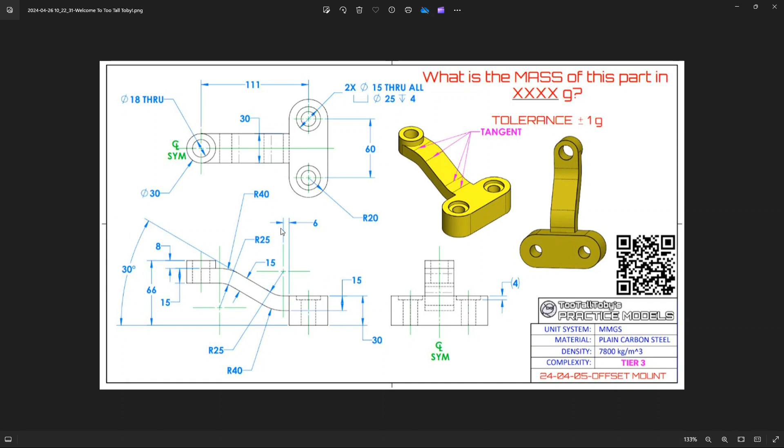Go ahead and hop over to IronCAD and I'll show you how we can design this. IronCAD has a lot of standard features that it comes with.

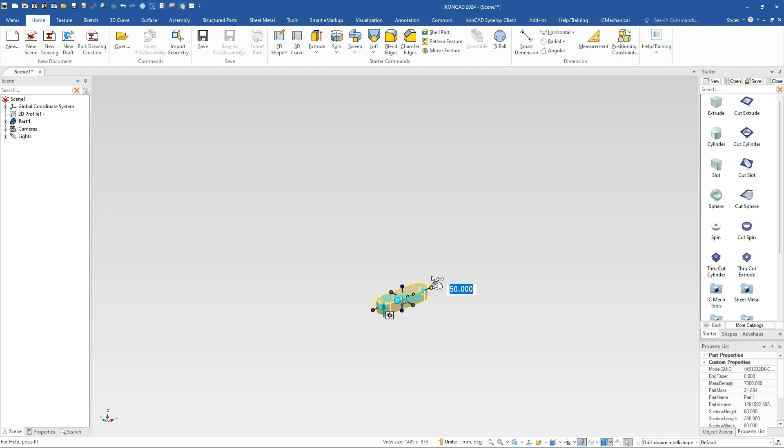For example, we have a slot feature that we can drag and drop out. We know this slot's length is 60 millimeters from center to center plus a 20 millimeter radius on each end, so that's a total of 100, which we can set up easily. Hitting enter, our handles toggle to our width handle, which we know is 40 millimeters, and the height, now on top, by hitting enter again, we're going to set that to 30.

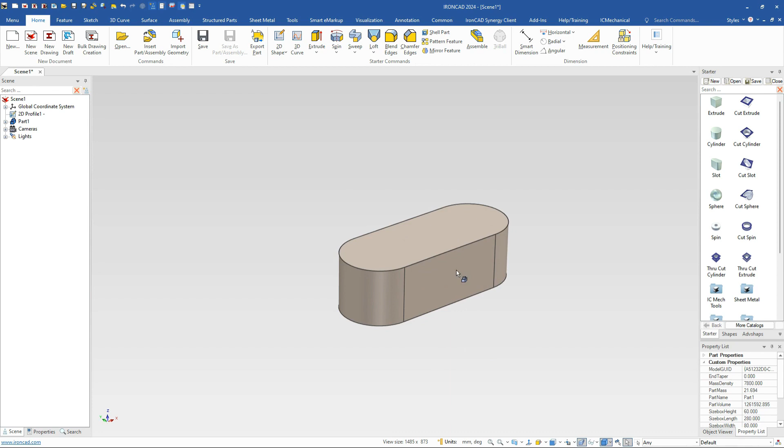So we quickly set up our base geometry, and we're going to just drag and drop a cylinder onto the center point of our slot.

We know this cylinder is going to be 30 millimeters on this one, and we want to go ahead and just extend this down to the bottom. I'll show you a simple way to do this.

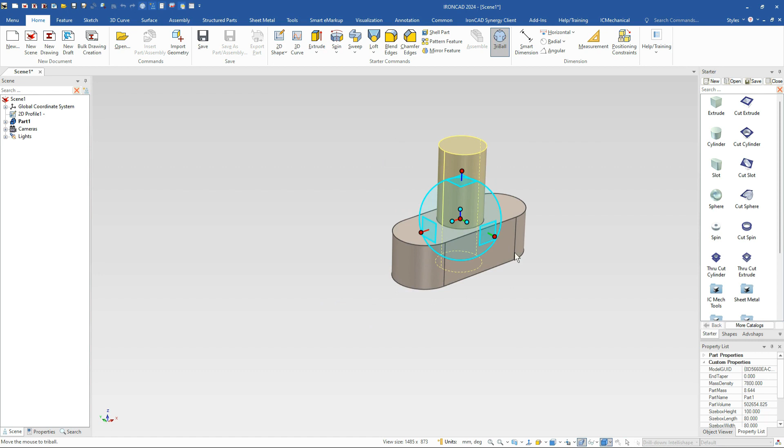What we're going to do is move that out because we have a dimension that is out from the center of that slot at a distance of 111. We'll place that, but they give us a distance or total height of this thing from the top of the model, so from the bottom to the top we've got it in place. That's why I pulled it down to the bottom.

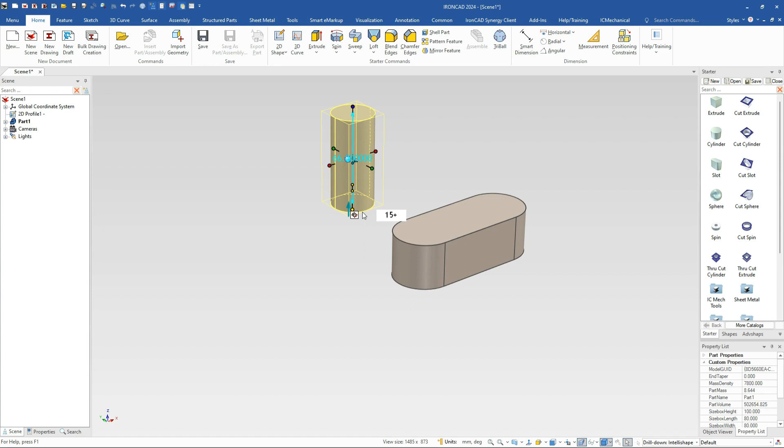We just type in 66, and we know the overall height is just kind of an offset here. We're going to type in 15 plus, and they gave us a value of 8 inside of there to position and size that cylinder. So that gives us our base point for our geometry.

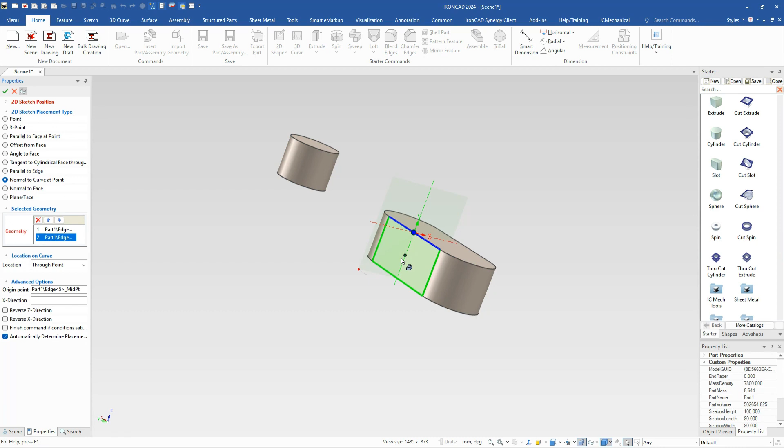Next we're going to do our extrude here, and we're going to do a mid-plane extrude. Let's go ahead and select our part and create a sketch. In this case we want to do it normal to curve, right at the top of this model, along this edge on the midpoint, that's where we want it. We'll go ahead and hit OK to place that.

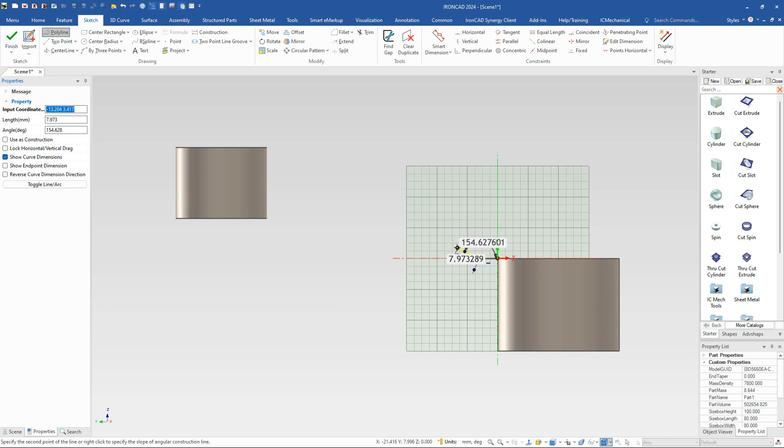There are multiple ways that we can create this. We can create some lines, some cylinders, and do some trimming and positioning with those curves. Another way is to use our Polyline command. We can start at our 0 point, move it out, right click, and say we want a value of 6 millimeters off of there. We're still in our polyline, but if you hold your left mouse down and click, it changes into an arc.

So we want an arc here, which automatically gives us our tangency there, and then we can just right click and put the values that we need for this. We know this needs to be a radius of 25, and we want a negative 30-degree angle on that. Now that puts us right where we need to be, and we can pull this line up however we need. Just make sure our tangency, you see that blue tangency icon there, so move it off and move it back. That maintains our tangency for us.

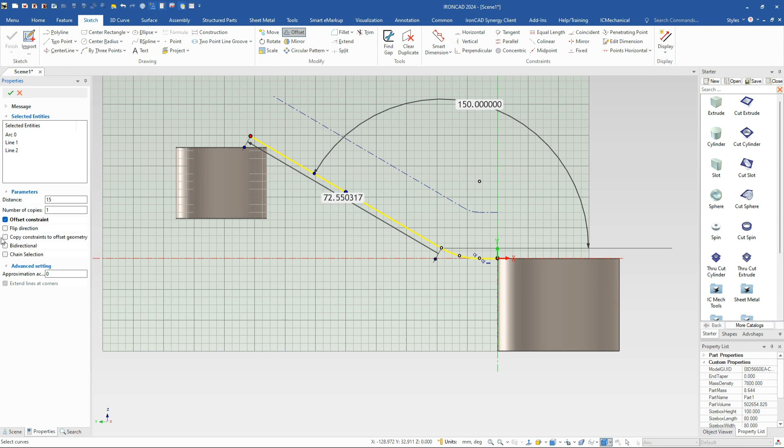So that gives us exactly our curve that we need to offset. Now we can simply select this curve, offset it, type in a value of 15. We're not going to use constraints here, but we can just flip it around to do that. So that gives us our offset values there, and go ahead and hit place for that.

Next, we can just draw our 2-point arc for this one, which is on our center point here out, and offset it as well. So we can select that and offset it 15 millimeters as well. And we simply trim off our geometry. So we don't need this here anymore, or this information. We know when we offset this one it will actually give us our 40 for that value. So these two in this end is almost done.

We just need to add our fillets and our closed lines. So we'll simply add a fillet here, which in our case is 40, and this one is 25 for that one. And last, we can just draw our line.

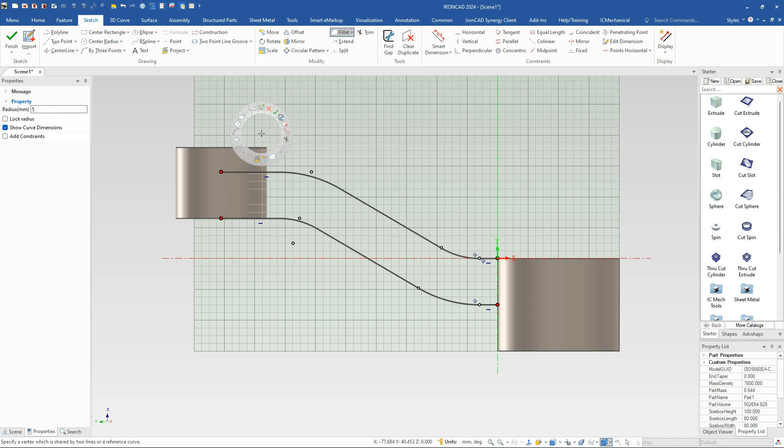Again, you can go up to our ribbon bars like what I'm doing here, or you can hit your S key on your keyboard, and you can get into the line command there as well. So however your preference is to work in IronCAD, you can do so. Basically, we're just building this curve without doing any type of constraint dimensions or anything like that, which you typically find in other systems, but we can just do it with our curve geometry and options in creating this.

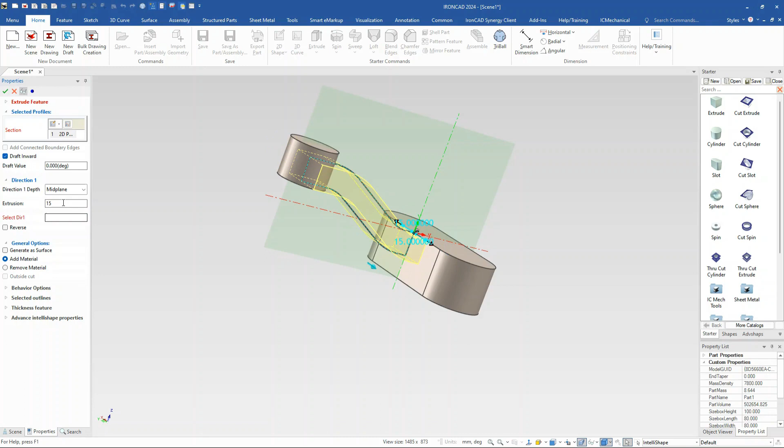So that gives us our shape. We hit finish. And now we can do a mid-plane extrude, and we know that it's a total width of 30, so we'll just put 15 for that. That gives us our values for there, and hit OK, and that will create our shape for us.

So there's our base shape, and the last we need to do is our holes and our counterbores here. So we're going to use our cut cylinder, and we're just going to drag and drop that up onto our center point there, and we know it is 18 millimeters.

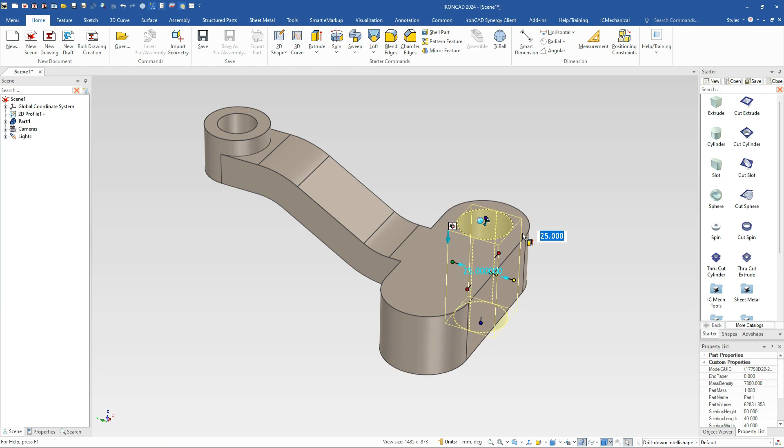For that one, we're going to do the same thing down here. In this case, we know the through hole on this is 15, and we'll just drop a cut cylinder to create the counterbore, which is really easy again. So we just type in the values for what the diameter is, keep hitting enter until we get our handle to the bottom, and we type in the depth for that. So that gives us our shape for that.

We can select both of these, use our TriBall by hitting F10, simply right click, hold our shift key down and on the arc so we get to the center point here basically, and we're going to make a link of that shape. That basically completes our model very quickly and easily in IronCAD.

And if you want to look at the information, go to the properties. We're currently in the wrong units here, so let me go ahead and change that to grams. There we go. Now if we select our model, it should be 1136 for that model.

So there you go. That's how you can build this in IronCAD, quick and easy. Hopefully you enjoy.